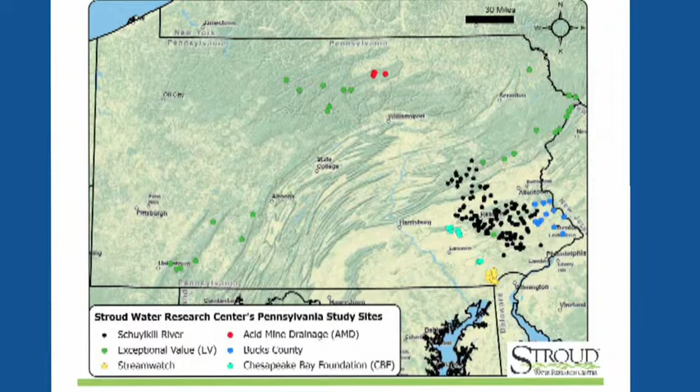So right now, we are doing a lot of work in Pennsylvania, as you can see all these active study sites that we have going. But we are also doing a lot of work throughout the United States on some of what we think are the more significant rivers, like the Susquehanna, Mississippi, Flint River. We're doing work out in California, just a lot of work in the United States.

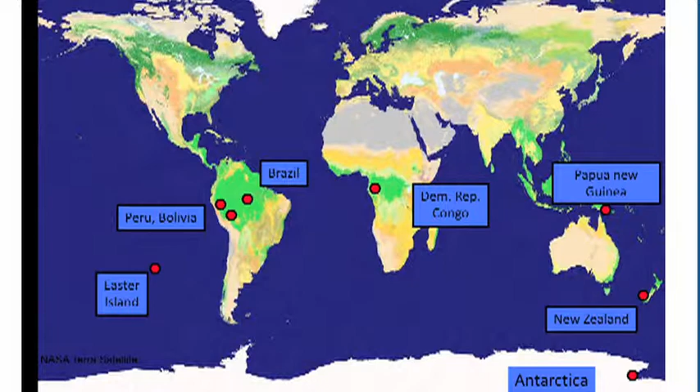But we also have a global reach now, and so we're working on right now 6 of the 7 continents, including Antarctica. Doing work in New Zealand, Papua New Guinea, 2 of the largest rivers in the world, the Amazon and the Congo. And so we're busy. We have a lot more employees now than we did 45 years ago when we started.

And over 25 years, we added a little bit more space and a meeting house, but it wasn't really that significant. But in 1991, things started to change. That was the second year that I took over as director, and we developed a new strategic plan.

And basically, we were going to increase the depth and the breadth of our scientific expertise, and we were going to create an education program, and we were going to do public outreach. And so that was really new and exciting.

And all of a sudden, school buses were arriving at the Stroud Water Research Center that hadn't been there for 25 years. Very quickly, within a couple of years, we outgrew that space that I just showed you, and we had to do a complete renovation of the Stroud Center.

We had to have a new entranceway created because the whole facility had to be accessible to anybody that was physically challenged. We had to add teaching space to the meeting house. We had to add new laboratories because we had new scientists working there.

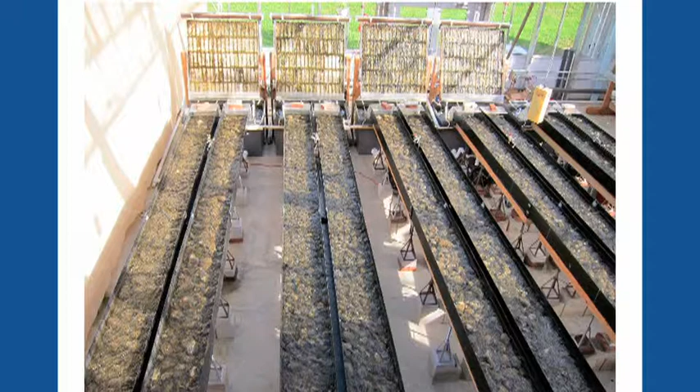And we added a stream house, the world's first stream house, which is a greenhouse with basically flowing streams in it, which would enable us to do the kind of research that needs to be done and that really couldn't be done anywhere else in the world. And so we do that now. We have this facility.

Very quickly, within 10 years, that new space that we created in 1998 became obsolete. Basically, as Susan said, very quickly, the teaching lab that we thought was state-of-the-art in 1998, we realized was overcrowded. We couldn't handle full busloads of kids. And by the way, school districts like to handle full busloads of kids. They don't like to send a partial busload because they have to pay the same amount for the driver, right?

So it was crowded. We had no outside windows in the teaching lab. It was like it was a basement. It was a damp basement, and we needed to change that. It wasn't really facilitating what we wanted to have happen in that teaching lab.

As she mentioned, I had my director of communication and marketing at the top of the stairway in our meeting house, the fire stairway. And needless to say, that person stayed for about 13 months and then left. I don't know why, but it's the only stairway in Chester County that had a copy machine in it.

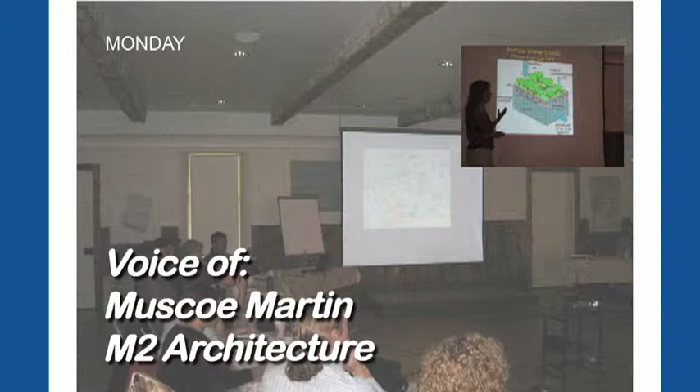We then engaged in a charrette, and many of you probably have heard the term. In this case, we use it as a design workshop, and we did a 5-day event at Stroud, bringing in our entire design team, staff, and board members from the organization, neighbors, regulatory folks, an artist or two, potential funders, in order to gather input about where the building should go, how it should work, what the key factors were, how to take those touchstones and turn them into a design. And part of that is education.

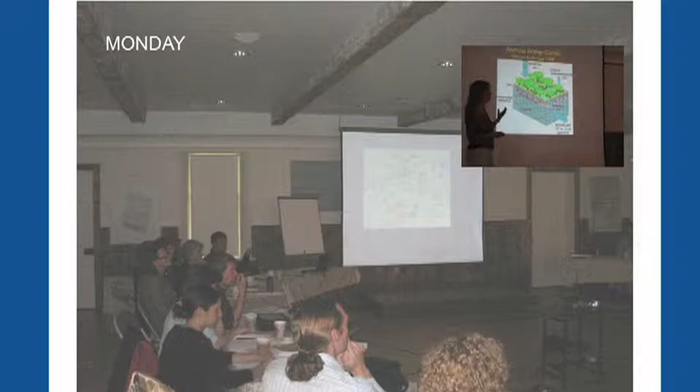Here you see Michele on the first morning of the charrette explaining to 50 or 60 people how hydrology works, how the hydrology works on that site, and what kinds of things we need to do to improve the health of that site.

So Bern showed you the existing building. That's the stream house, which is the greenhouse. There's some other ancillary structures around. There wasn't a lot of place to put a new structure, but we had identified 5 locations, and the main purpose of the charrette was to figure out which one of those it should be.

And then we began working in small groups. You probably all have been part of these kinds of things, splitting up into small groups. There's somebody from the design team, a board member, committee member, neighbor, artist in each group, all beginning to put these pieces together and figure out where the best place to put this building might be.

And after meeting in small groups, then we present where everybody is. Over the course of that first day, we developed 5 or 6 schemes for where the building can go, how it might be configured. At this level of detail, it looks pretty crude, and in essence it is, but encapsulated in these little sketchy sketches, as we call them, is quite a lot of information about what is most important to each of those groups.

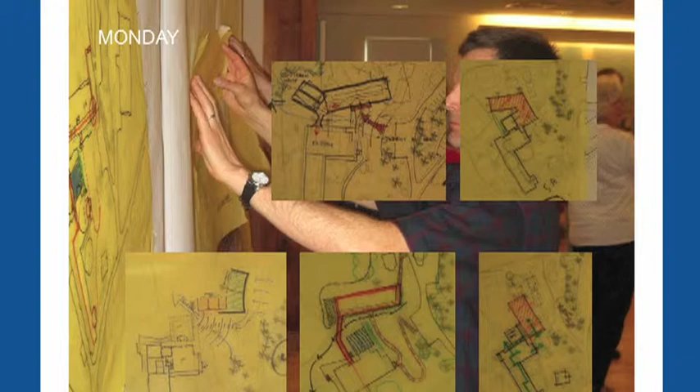We put them all up on the wall, begin to look at it, talk about it, and after that first day, we discovered half a dozen really important things that we didn't necessarily know before.

Some of the other things you can see here: creating an easy flow of people, wanting to make sure that they could connect from all parts of the building into the new structure, a more natural flow of water, and making sure we have good daylighting, natural lighting in all the work and study spaces.

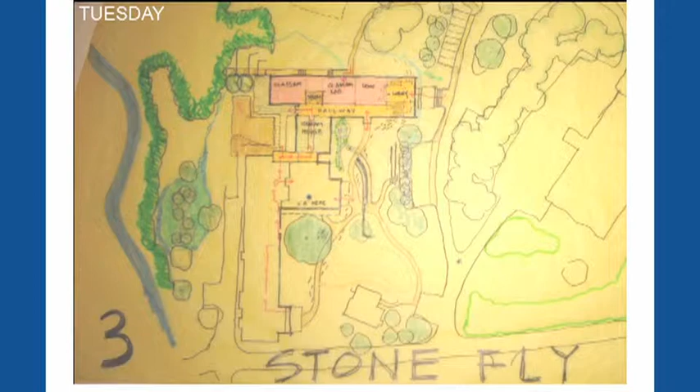So there were 2. And Caddisfly was the one that in the end bubbled to the top. You can see that there's the stream house, so it's connected like this. One of the key things we needed to do is reorient the site and make a new front door.

So that's the front door when we began work, all the way down here, but the parking is here. So we needed to create a new front and center door that gave some architectural interest to the overall composition. Remarkably, from day 3 of a charrette involving about 50 people working together over the course of those 3 days, the final design is almost exactly what you see there.

You developed it a little bit more, and one of the key things that we began to work on once the building location was developed was how to incorporate and integrate the site work. That meant circulation both for people, for vehicles, for water, for critters. So how we get in and out of this building, how we kind of travel up and down the slope, how water is going to flow on this site, rainwater and the stream water, how people are going to move throughout the building. That became a very important aspect here.

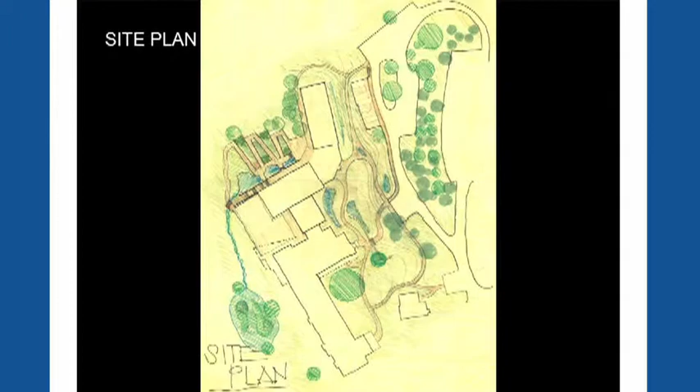So as you see, the drawings start to get a little more detailed, a little more finished, a little more professional looking, but the key decisions that got made on that day 3 with all that input really carried through until the built project, which I will say doesn't always happen. We aren't always able to take it all the way through, but in this case we did.

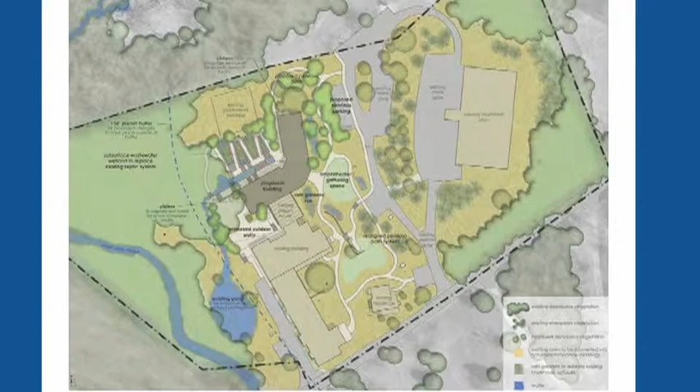So a couple of things that came out of the charrette that were really important, that connection between the existing structure and the new building. One of the conceptual blockbuster problems that we had to get over was how do we get through the stream house, which is a place of research, but how do we use that as a circulation node, if you will. What we discovered we could do was actually build a second-level bridge that would pass through the stream house, allowing people to look down and see what's going on, but they couldn't stick their fingers in the experiment and mess with it.

So being able to build that, conceptualize that bridge - this was a sketch that came out of the charrette that showed, well, we could have a bridge that went there. And Bern said, well, wait a minute, we can't have a bridge in the greenhouse because it's going to block our sun for our experiments. So I had a young associate in my office say, well, I've seen a glass bridge, you can actually build a bridge out of glass. Sure enough, that's what we ended up doing.

The importance of that front door here, sort of having a kind of front porch, front yard, if you will, was part of this. And a backyard that looked out towards the creek and towards this very lovely site that Stroud sits on. Being able to see through - one of the things they didn't have in their old facility, in the way it was currently configured, was the sense that you were actually on this really beautiful place and that there was a stream out there that was key to their research. So making sure that was part of that, the view of that.

And then some ways to get in and out of the building, both for students and for service. Now, I mentioned that the important thing about the teamwork is kind of getting to this high level of performance. In terms of getting the water right, one of the things that meant for us was that all of us had to work together.

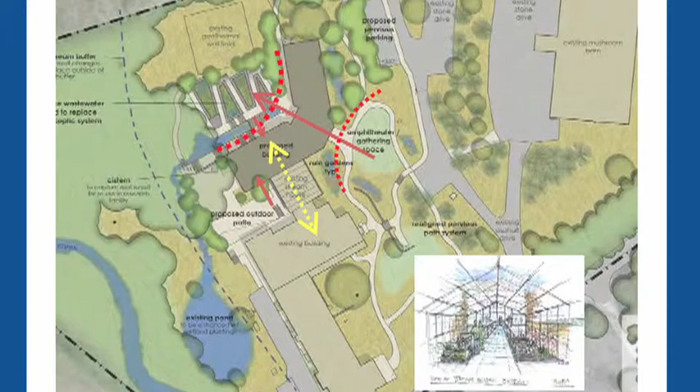Civil engineer, the hydrology, the landscape architecture, and the architect all had to get this right. One of the key things about getting the water right here was where the building goes, and not just in the X, Y directions, but in the Z direction. So where the front door, the elevation of the front entrance to this building - we spent weeks getting that right. Because you got to get the people in, you got to get the water around the building. So adjusting that situation is a critical aspect of getting the water right here.

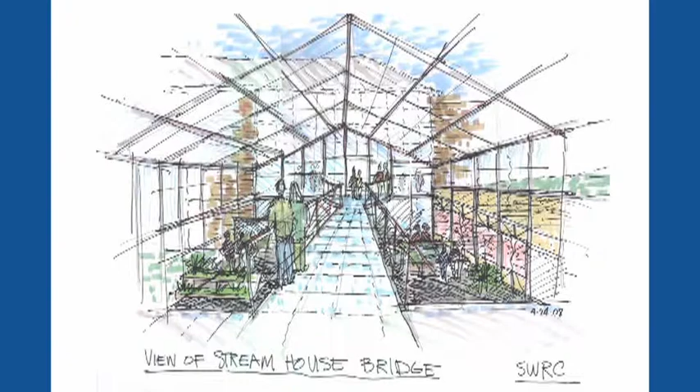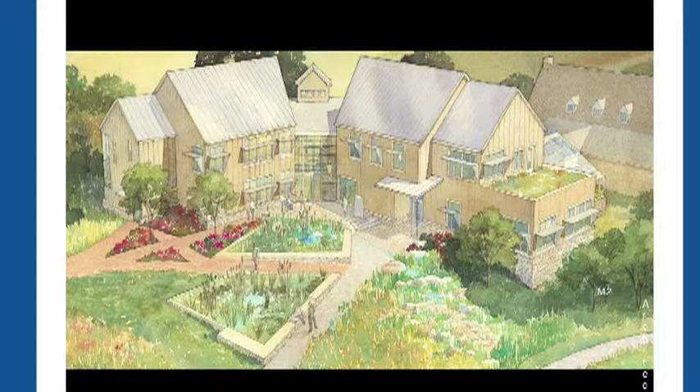So this rendering came much later, after a year's worth of work really developing the details. This is from the back side of the building. You can see the existing structure over here, the stream house hiding there. The design of the building sits in comfortably, we think, within the context, the vernacular context of a fairly rural agricultural site, meant to look a little bit like a barn, similar materials to what they had on the existing structure, but taking advantage of the fact that green architecture was a key thing, using local materials, locally quarried stone, and you'll see that as we move into some of the construction photographs.

There is a fundamental question that we face in every project we tackle. The number one question is: what is the water coming from, and what is the water going to? You want to track that flow of water because, as Muscoe and I talked about it, form follows flow, but form affects flow. So you have to be very conscientious about those decisions.

You're going to be making some significant transformations to the existing conditions of any place. We feel it is our responsibility to provide solutions that are positive contributions to the circumstances of any one site. So we started at a very large scale, really understanding where the site is located.

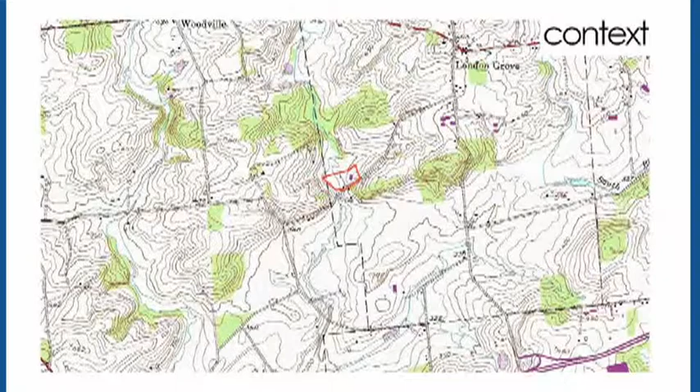This is just a copy from a USGS quad map. You see White Clay Creek here. What is it telling us? It's telling us that the site is facing west. So afternoon sun is important, morning sun is going to be scarce. So think about how you place walkways and orient buildings and so forth.

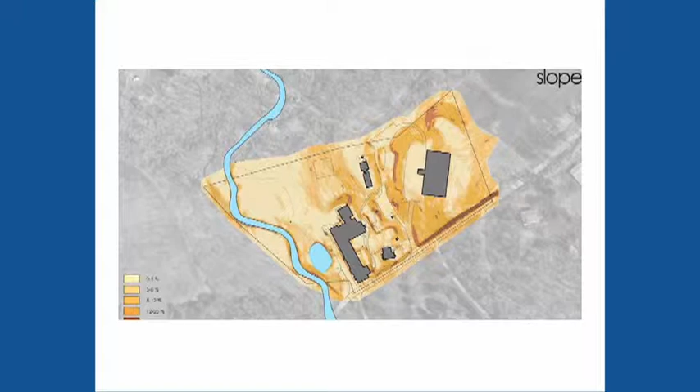There's a certain amount of water coming through this slope, as you can imagine, draining down into this valley. So water was important. As we navigate through these slopes, we do an analysis of what is steep, what is flat, what are the places where we can carefully circulate, and the places where we're going to have to spend a little more energy moving up and down.

Then, of course, we looked at the way that topography has actually moved water through the site, and in doing that has generated different types of soils, and really understand how the water is going to move through the soils and make it all the way down to the creek. How are we going to begin to affect that? The general geology of the place may inform us of the capacity of the site to infiltrate runoff or not.

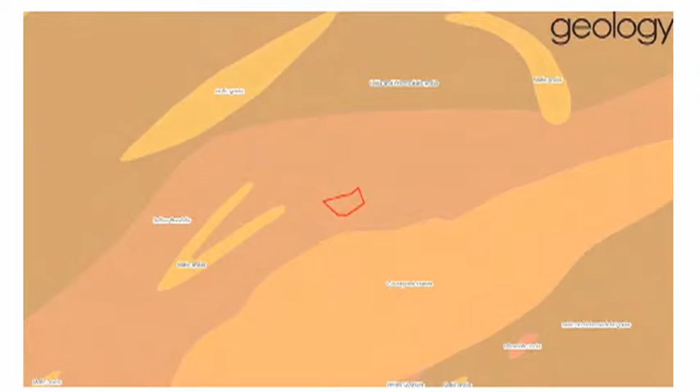One of the things we were trying to do was to get the water right. So to get the water right, you want to mimic pre-existing conditions, hopefully ones equal to the forested landscape that occurred there centuries ago.

Then what kind of existing systems are in place? Woodlands along the streams, cultivated landscapes, man-made interventions — really understand the basic bones and structure of the site, because these are your building blocks. How do you move around? As I mentioned before, aspect is a very important circumstance, because aspects

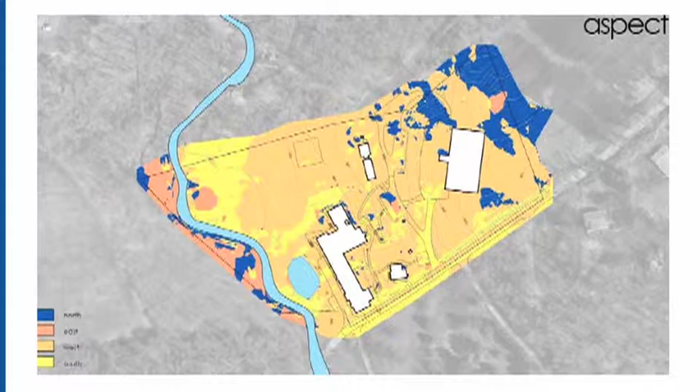transform into essentially BTUs per square foot of solar radiation. As you think about that, that's going to affect temperatures, the way you feel on the site, the way you navigate through it, whether it's morning or afternoon, the way you connect to the circadian rhythm at 12 o'clock noon every day. But also, how do you organize the new landscape and new living systems that are going to be on the site? This is actually the way energy is moving, and it gives you a good understanding of that.

Then really understand how all those factors, as you try to understand them, you simplify them in a way that tells you, for example, what is a series of plateaus or transitional slopes, and how you're going to be moving around. We believe that with positioning the landscape comes responsibility.

For everything you do on a site, you have to be aware of the consequences. So understanding how the water moves through the site — if you think about it, the original construction of the buildings was placed taking advantage of the views and the proximity to the creek. But in a way, they are acting like dams for the water to go from uplands down to the creek.

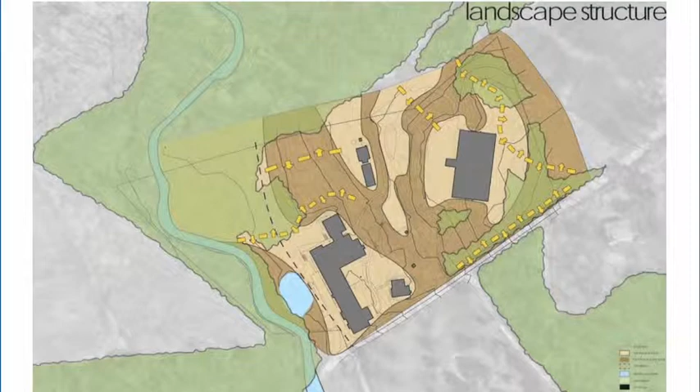So it became a fairly significant challenge for the project to really understand how the building had to be constructed, and all the interventions on the site, to let that water that originates in the uplands find its way all the way down to the creek, both at the surface level and below through the site.

Another aspect of it, as Muscoe was describing, is how do we circulate through the site, and how do we accommodate the number of parking spaces that are required? How do we think about overflow situations so we don't design for Black Friday when we have the internet available to us, and Black Friday is no longer Black Friday. We want to make sure how little can we build, not how big can we build, and how do we take advantage of the existing conditions that we have there?

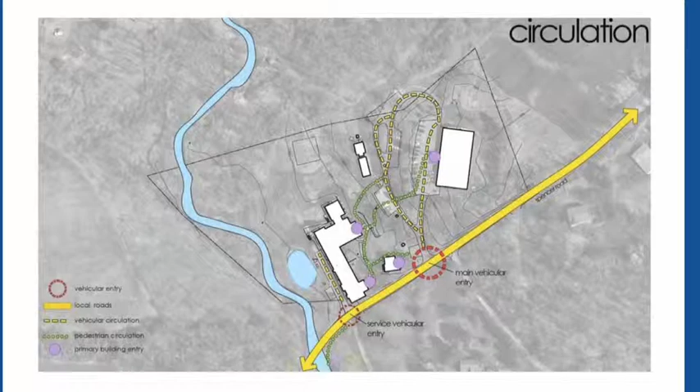Can we actually turn a bus around? Can we actually utilize areas of the site that are underutilized? And then how do we get from parking areas and arrival points to the destination, the entrance of the building, circulate through the building? How do you manage the flows of people, whether someone comes to visit versus a group of students in groups of 50 or so? And all of them have to be compliant with current regulations and ADA accessibility.

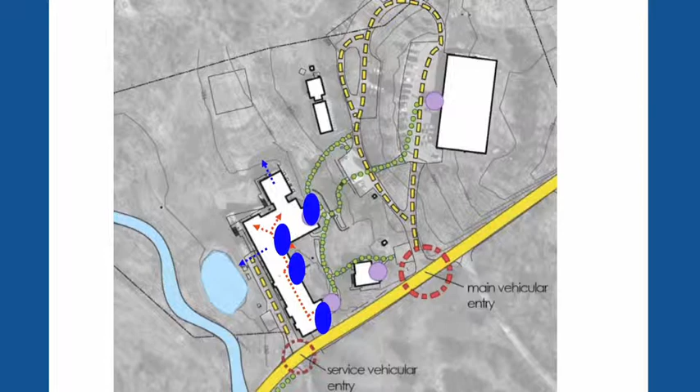So there were a number of entry points that we needed to connect, and a number of arrival points. But we think about the journeys from those arrival points or parking areas to the destination and the building as teaching moments. How do we inform those journeys, I think, is part of the brief and informs the design solution. So I'm going to turn this over to Michele to tell us a little bit on a broader scale where we are on the site.

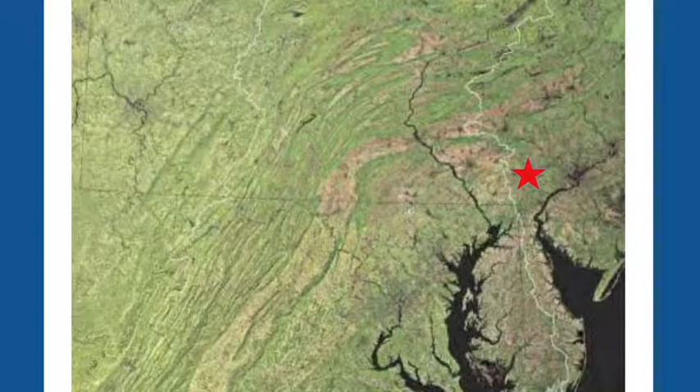Thanks, Jose. And as Bern and Susan and Muscoe and Jose have mentioned, getting the water right drove everything on this project. So it's our watershed address, not just in the White Clay Creek, but thinking about how everything we do affects ultimately the Christina River and the Delaware Bay.

In the charrette process, we looked back to when the site was Penn's Woods, and we still have about 45 inches of rainfall, but that wonderful woodland landscape and soils were this beautiful sponge that took all the water such that there was very little runoff. And the trees and the forest put the water back up in the atmosphere.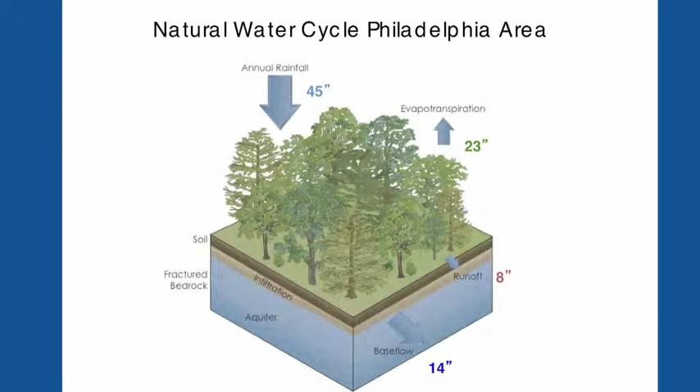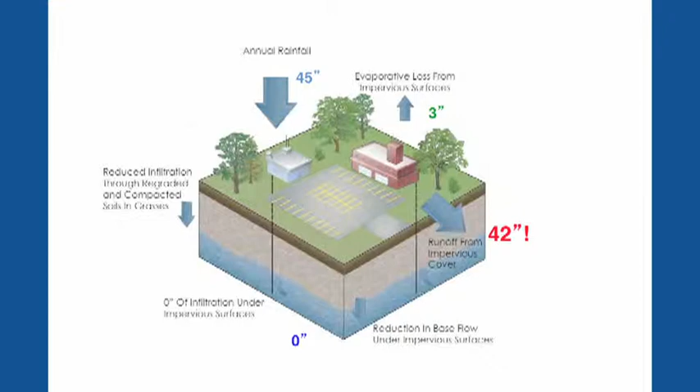So that was sort of our guiding touchstone, could we build a site that did that, because as we've changed our sites, we still have the rainfall, but as everyone here knows, we have tremendous amounts of runoff from our built landscapes. And this is the most boring numbers, so bear with me a minute. Early in the project, we looked and said, well, how much effect can this site out in the countryside really have? We saw that it had a good amount of impervious surface and a good amount of lawn.

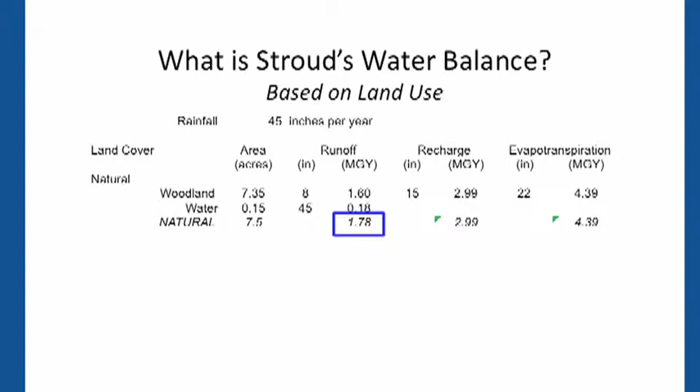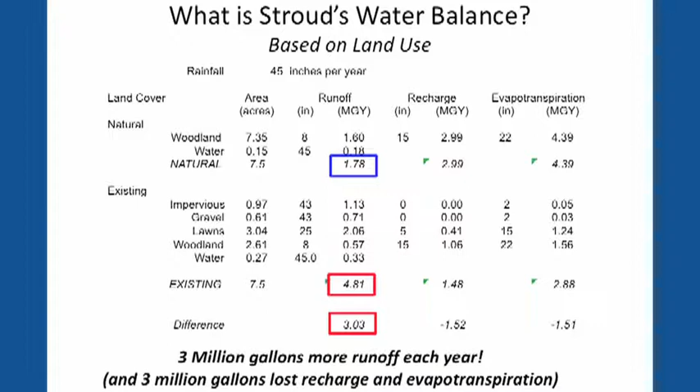When we started to put some numbers to that in the charrette process, we found that in a forest there'd be about 1.8 million gallons a year of runoff. But with the site as it was, we were generating about 3 million gallons a year of runoff from this pretty rural, nice-looking naturalized site. And so that became a touchstone. How could we put the site back to work more like nature? And could we make that work?

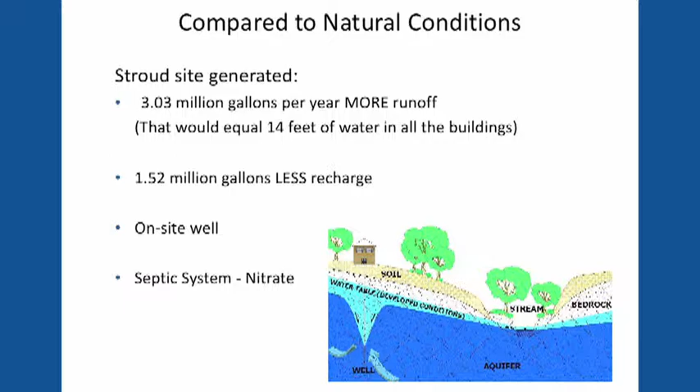Other things to think about: Stroud had an on-site well for its groundwater and an on-site septic system, but it was a traditional septic system generating nitrate and various pollutants. And we weren't thinking about how those systems were really connected.

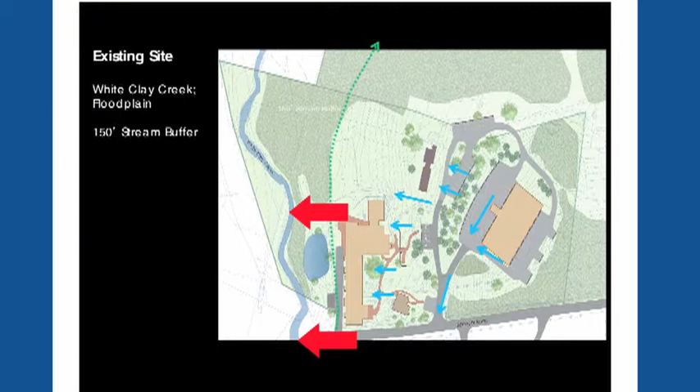So we looked at the existing site, and when we looked at how it worked, there was a mushroom house at the top, and that was generating a lot of runoff coming out and down the road to the driveway down to Spencer Road. On the site, things were sort of just going and hitting the building, but there was no stormwater management per se, and ultimately everything was getting to the creek.

So we started to look about taking the site apart in pieces, and this was part of the charrette process. We started at the top of the hill and followed the water down, drop by drop. And up at the mushroom house, we said, what if we could take the water and have a series of rain gardens and infiltration trenches and take the water in another direction, off to a level spreader that dispersed it gently into the meadows and buffers.

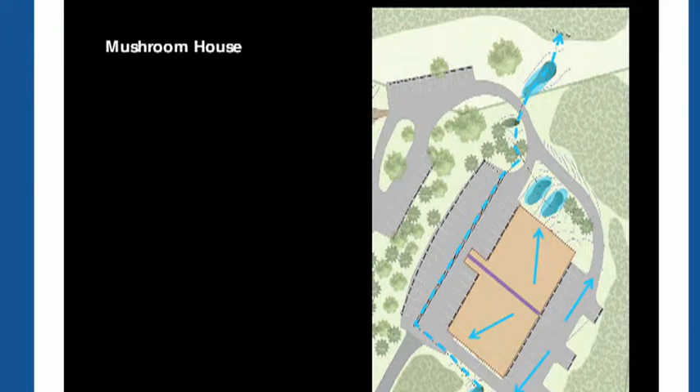And down below, could we do the same thing? Could we put a system in?

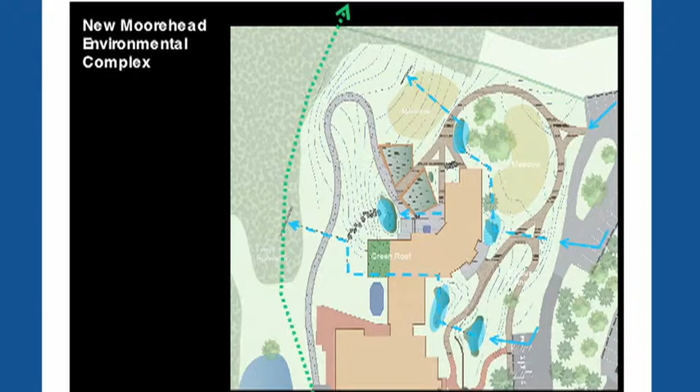We had to bring water between our new building and our old building, but could we have a series of rain gardens, level spreaders, a green roof that put the water back into the landscape along the way instead of piping it all someplace and letting it soak into the ground? Getting the water right was the theme.

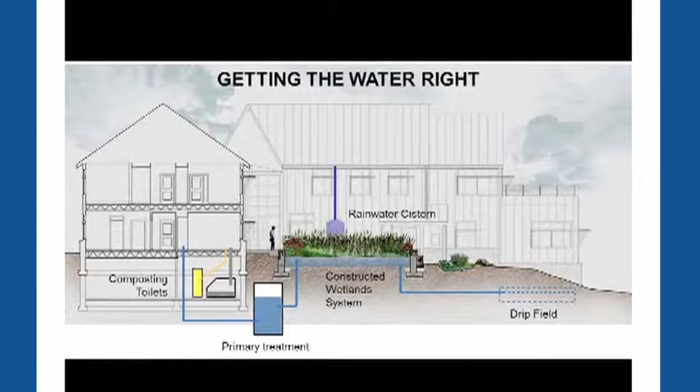The other components were a constructed wetland system and a rainwater cistern, both above and below ground—a constructed wetland system that would take the wastewater, treat it before it was discharged to a drip field, and achieve a cleaner level of pollutants. Maybe someone else wants to speak to that a little more.

So there's the site after the building had come into place. There were a number of things along the way—maybe at this point we ought to pass the microphone around, because getting there wasn't easy. We had a geothermal system that had to go in first, and a geothermal system is anything but easy to construct. It makes a lot of muddy water.

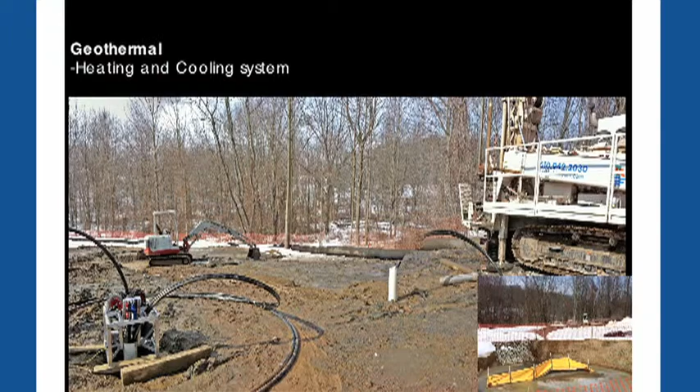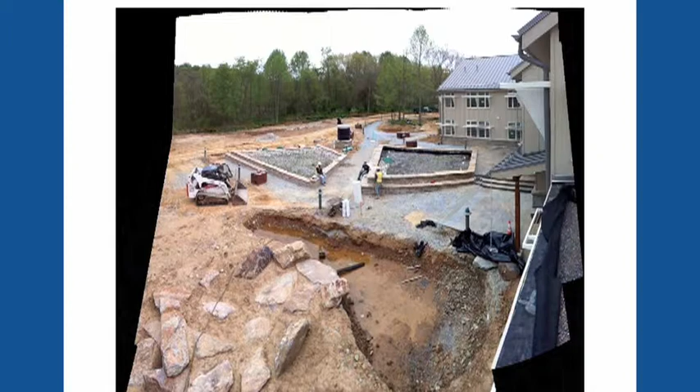So you can see the challenges of a site like Stroud not having muddy discharge to the creek. What we ended up doing was constructing a sediment bay for all the material coming out of the geothermal wells in the back, in some of what would become the rain garden and wetland wastewater systems. Is that right? Did I get that one right?

So there are a couple of things of notice here about the complications when you're trying to do this. We initially felt it was very important to make the constructed wetlands ensemble a very important feature of the site and the project itself, and we wanted to place them in the new courtyard formed by the building.

The problem with the systems is that they need to be level—they need to be absolutely flat terraces. And we had a site that is sloped, as you noted before. So we needed to actually create a series of level plane areas and then thread the circulation so we can achieve ADA accessibility for the entrance to the student area here.

In doing that, we knew we were going to create a series of changes in grade, and hence the opportunity to create a series of gathering spaces and moments. So this is intended to be an area where students can gather before they go into the classroom, or gather after they come out of the classroom.

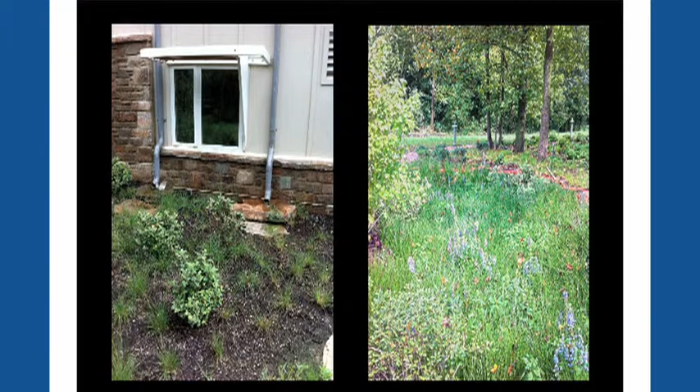One thing they did very well at Stroud is there's many types of best management practices, from the rain gardens and the daylit water that splash blocks and comes into the rain gardens, and a green roof. But instead of being the usual Chinese menu, where people think of stormwater practices like you'll have two egg rolls and some whatever, it's a working system, and the different components connect. The green roof and roof areas overflow through the system, through the cistern, through the rain gardens, everything connected as part of a system.

There's signage for education, so visitors can find their way and understand what's happening both above and below ground. And then as we get to the end of the pipe, we have level spreaders, which are really perforated pipes hidden in those.

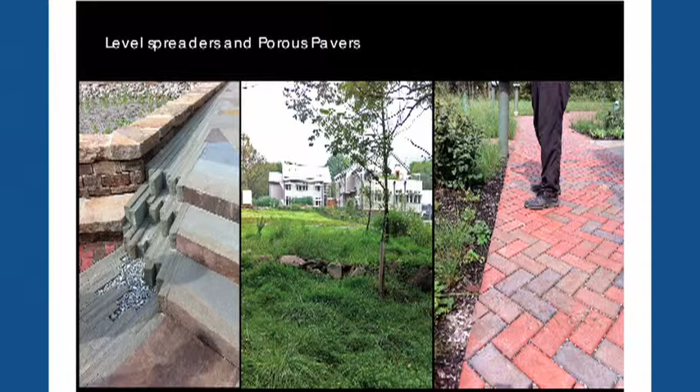This is actually an engineered system here. There's a perforated pipe, but covered in stone, meant to look like an old stone wall, that lets the water disperse along the level contour rather than an outfall with riprap and erosion. Porous pavers, as Jose mentioned, and there's cisterns, both an above-ground cistern and below-ground cisterns.

Maybe, Bern, do you want to talk about drinking roof water isn't easy? Yeah, so we incorporated cisterns into the project because we wanted to capture the roof water, and we wanted to use it initially to flush some of the conventional toilets in our facility, for washing your hands in the laboratories, and for a source of high quality research grade water, which is much easier to produce from rainwater than from well water.

We wanted to move away from the wells, but ultimately what we'd like to do is drink the roof water. Right now, the Stroud Center, because we have over 50 employees, we are a commercial water provider. At the present time, a homeowner can drink roof water, but a commercial water provider cannot take roof water and provide it to the public. So I can't take the roof water from this facility and provide it to my employees because it's against the law. There's no infrastructure in place to do that.

We've petitioned the EPA for a memorandum of understanding that if we do the research, we've built this building so we can do the research to prove that a commercial water provider can take roof water and make it potable, and we are going to do that. We're about to get a memorandum of understanding from the EPA to try to do that. I think we need to do that, and we need to do that in this country. It's being done everywhere else. Why not in the United States?

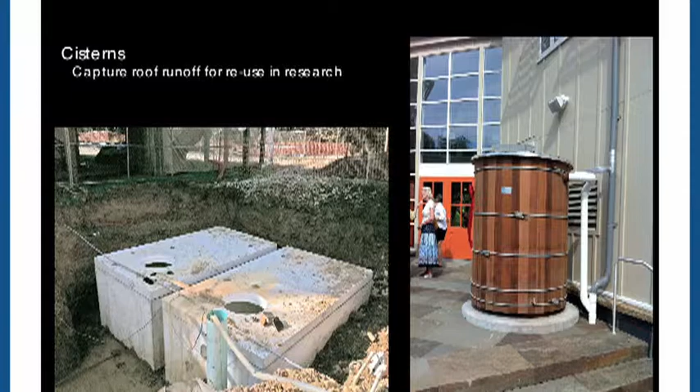So we have this several thousand gallon tank in the ground, and this really beautiful teaching cistern to the right. Ultimately, my goal is to be able to drink the roof water, and we will do that. You will come to Stroud Center someday and drink the roof water. I don't know how soon that's going to happen, but we will do it.

You get the bird droppings out of it? That's part of the research.

Someone asked about bird droppings. It seems like you ought to be able to drink your roof water, but bird droppings are one of many things to worry about. Also, in urban areas you may not want to drink roof rainwater directly because the rain falls through an atmosphere full of particulates and smog, so it's not really safe to drink straight. We treat the water at Stroud with multiple levels of filter. There's a first flush diverter that takes the first few hundred gallons, so in theory bird droppings get flushed out initially, especially if it hasn't rained in a while. Then we have a series of other filters and ultraviolet disinfectant, so it does require some processing. But the possibility of taking it to the next step and turning it into potable water is what should be pretty exciting.

One of the hidden agendas of this project is the idea that we see a significant opportunity to change how regulations and health codes are applied to the use of water. We can think about decentralized water treatment systems that function with solar aquatics, taking advantage of life forms that can produce very high levels of pure water, which is already in place in many parts of the world but not here. We find this a significant opportunity, and if we hit all the notes, I think we'll be able to make a change on the regulations, and we couldn't think of a better group to do it than the Stroud Research Center.